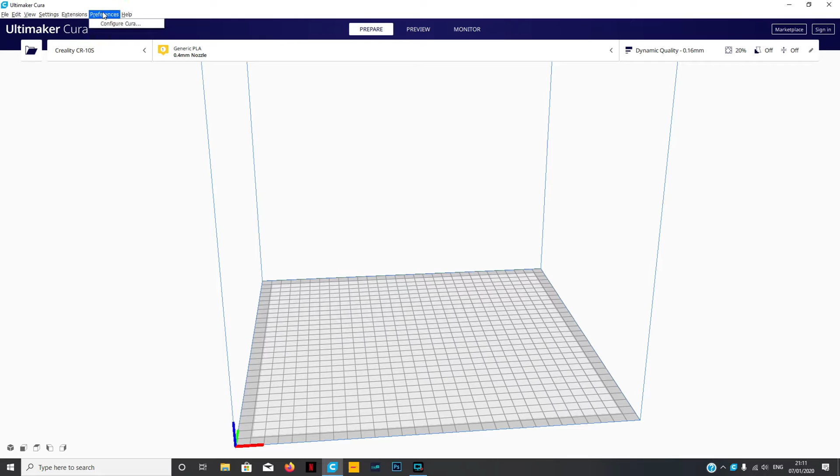And there we go. You're not going to be greeted with this screen to start off with when you're first setting up. I'll quickly show you what screen you're going to be greeted with. Now you're going to be greeted with this screen where you need to add your printer.

If you want to, you can add a network printer if your printer allows it, but I wouldn't recommend this option. The only problem is if you're running Windows like I am and it decides to do a Windows update and your computer wants to restart, your printer's going to end up losing communication with your computer and your print's going to stop, so you're going to end up losing it. So I wouldn't recommend you guys doing that.

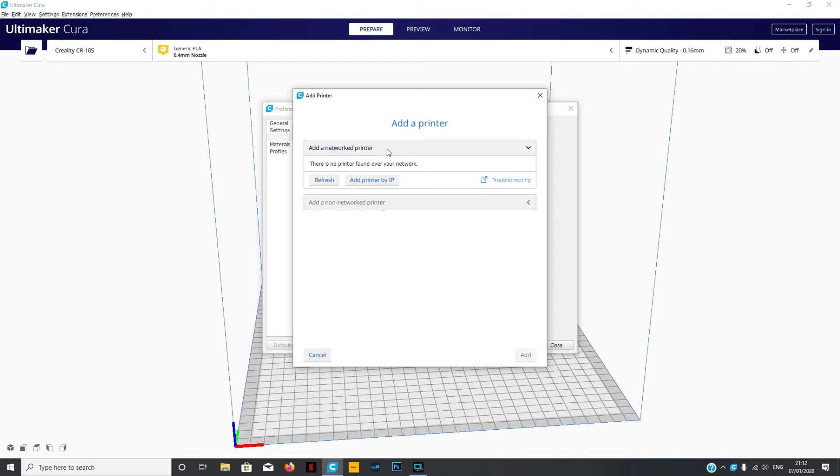What I'd recommend is adding a non-network printer. As soon as you click on that, you're going to be greeted with a big, huge list of all the different makes of printers. Now what I like about Cura is that mostly all the printers you'd use are actually on here.

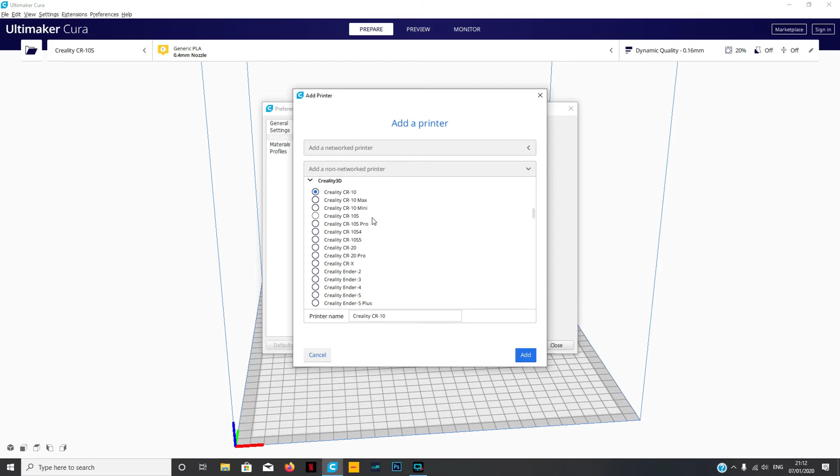So for instance, for me, I'm a bit of a Creality guy, so I'm going to open up Creality, and as I've just had a new printer delivered, which is the CR10S, I'll click that, and then I'll click Add. And then you're going to be greeted with the machine settings.

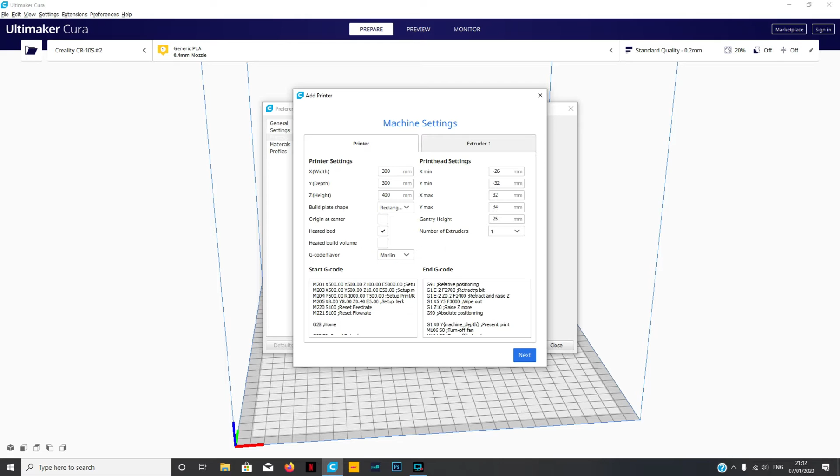Everything's already prepared for you. You don't actually need to touch any of this. This is all set up for you by Cura, so you don't need to change a thing. You just need to click next.

As you can see, I've got quite a large list, my printer is already added in here twice, because this is the second time I've had to do this, as the first time it crashed. So there we go, you want to close.

Now as you can see at the top here, you've got your printer selected, your Creality CR10S, and if I wanted to I could change it to one of my other printers that I've got listed, but obviously I don't need to do that because we're working on this one.

Right, what you're going to need to do next is obviously go and get yourself a file to print. So the best place to get them from is Thingiverse.

Now this is a free website. All the models on here are free to download, but they are all owned by individuals, so no selling them, people. That's not fair. So use it with a little bit of respect.

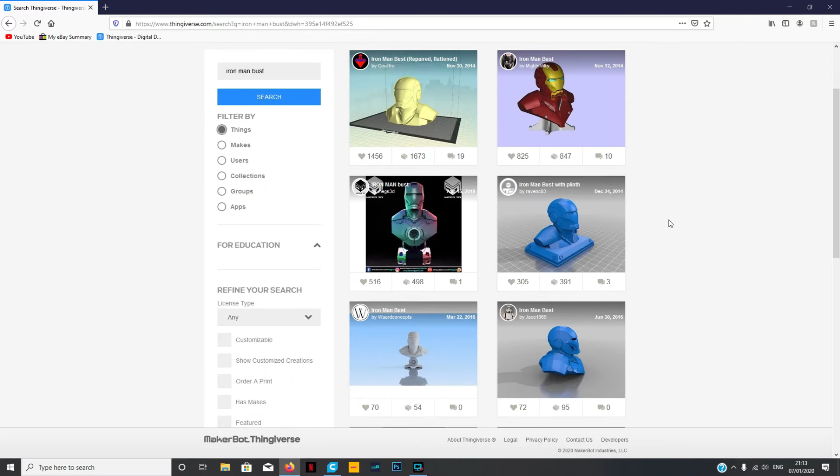So the thing I'm working on at the moment is an Iron Man bust. I've just printed one, and I'm going to print some more because hey, I love Iron Man. Once you've done your search, you're going to be greeted with all the files you could possibly want, so it's just a matter of going through and seeing what you fancy.

Well, I've just done a Mark 50, so we could go for, let's say, a Mark 85. Now there's going to be a lot of files in this, as you can see by the title - this is an Iron Man Mark 85 bust plus wearable helmet. So there's going to be a lot of files in here.

So we just click on the Files tab, and wait a while for this website to load because it is incredibly slow at the moment. As you can see, they are working on some performance issues. Hopefully it'll be resolved soon, but you can't complain because everything on here is free.

When it finally does decide to load up... really? Oh my god. Should have been a little bit more prepared for this, I suppose. I haven't actually used this screen recording stuff before, so I ain't got a clue. Yeah, still thinking about it.

There we go. Right, now these are all the files that are included. So once you're happy with what you've got, you can go ahead and read the comments. I'm not going to click that because then we'll have to wait another half an hour. But you can read all the comments of what people have downloaded and printed and what they think of it, and if there's any issues with it. Once you're happy, all you need to do is pop at the top here and obviously download all your files.

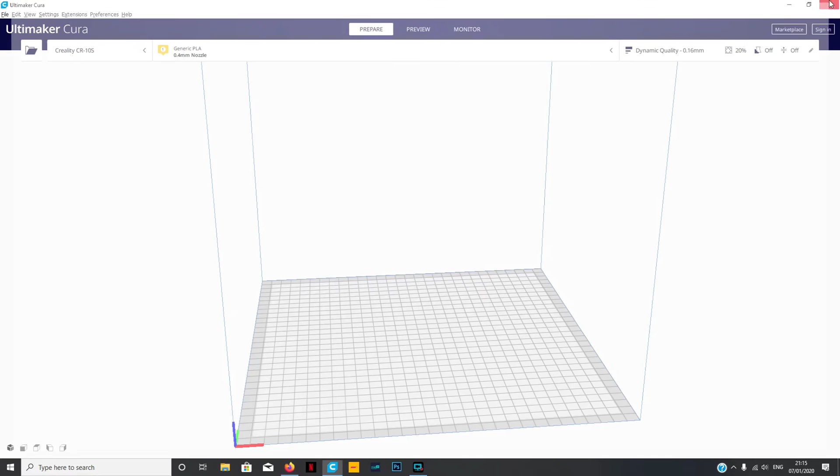Okay, so once you've downloaded your files, they're obviously all going to go into your download folder. As you can see, I've already downloaded some. So all you're going to need to do is extract or unzip the files, so you can ready to use them. Once you've actually unzipped your files, you need to put them somewhere where you know where they are. I mean, you see down here, I've made a folder with all my prints, and then subfolders with more of them in, and I've got quite a few on here.

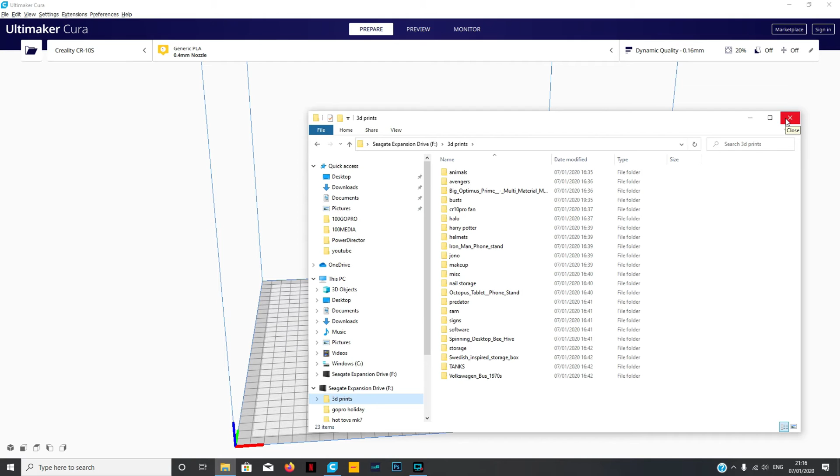So once you've unzipped them, move them to where you know they are, you're then ready to open up your file. So you need to click on your folder, and then you need to pick - not that one because that was another one - let's say this one. Okay, alright, you could check all the images to see the images of the files.

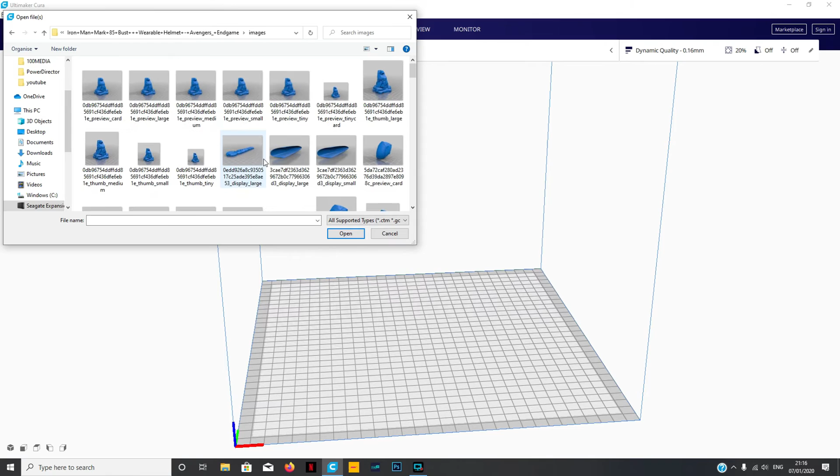And you go into the files, but I've already been through these and modified them, took out the ones that I don't want because there was lots in here, but these are the ones that are left that I actually need to print the bust.

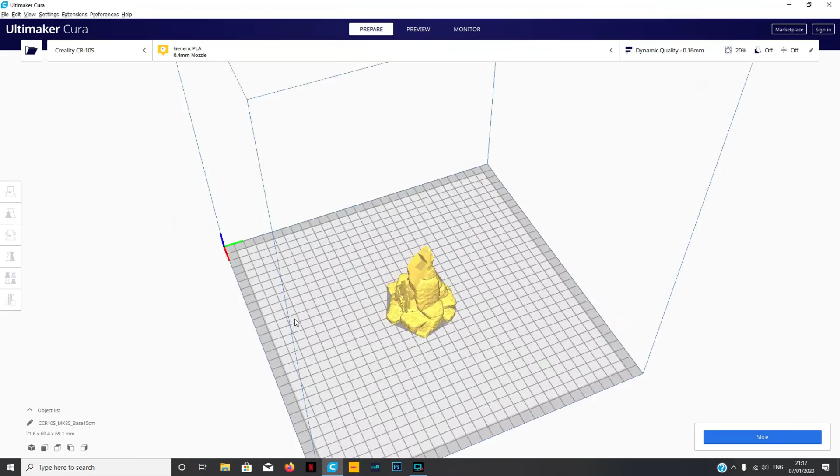Right, when you know which file you want to go for, we need to start off at the base. Open. Okay, there we go. And this is the actual part of the file - this is the actual model that we're going to be printing.

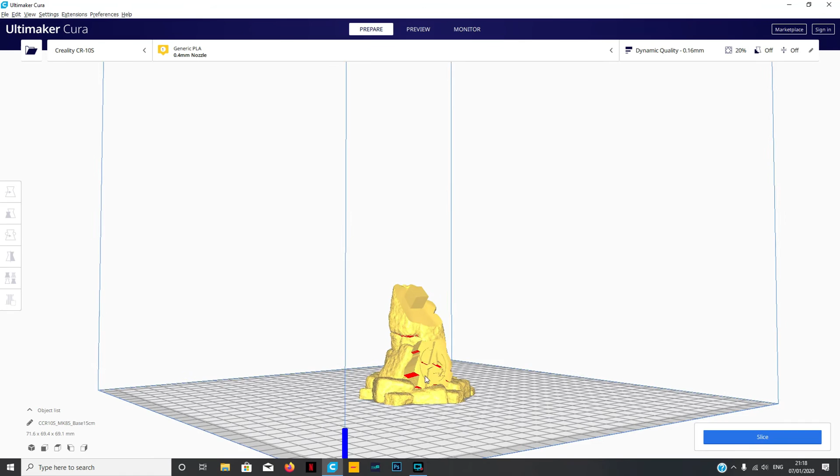I'll just have a quick look around it. Obviously the areas you can see here in red - don't need to worry about the bottom because that's on the build plate - but the areas you can see here are in red, they're overhangs. Now they're the parts that might give you problems when you come to print, not all of them will. These sort of angles here, they'll print just fine. But looking around this model, overhang wise, I really can't see any problem at all.

Right, now the next option is - this is far too small for my liking - so we're going to highlight the model and we're going to come over here on the left. Now the first tab is move, so you can hold your left click down, hold your left mouse button down, and you can move it around the build plate.

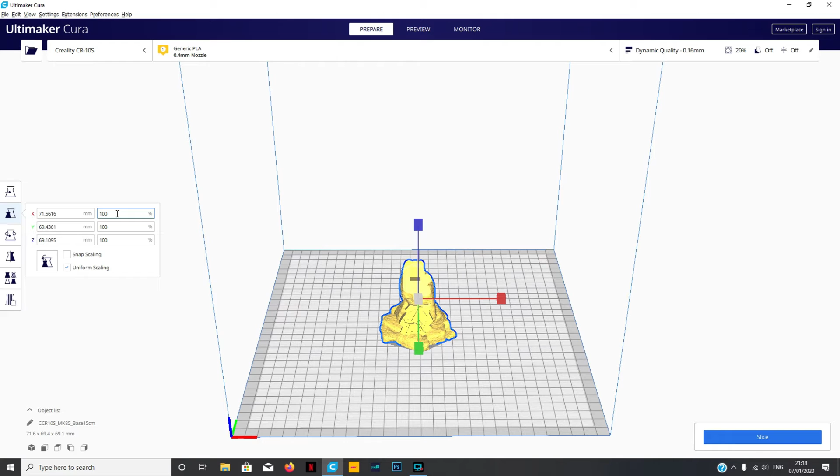Right, the second one down is scale. Now at the minute this is set to 100%, and obviously this is not big enough for me, so let's go in and put 200%. It's okay, we've just doubled the size of the model, so now it looks considerably larger. Obviously keep in mind, if you've done this 200%, you're going to then need to do every single other part 200%. One more note when you're into doing the scaling, you're best to have uniform scaling ticked.

Because if you haven't got uniform scaling ticked, when you adjust the X, which is obviously the width, you're going to get 200 width where everything else is going to stay exactly the same, so it's going to look odd. So just tick your uniform scaling and that'll then scale it all to size together.

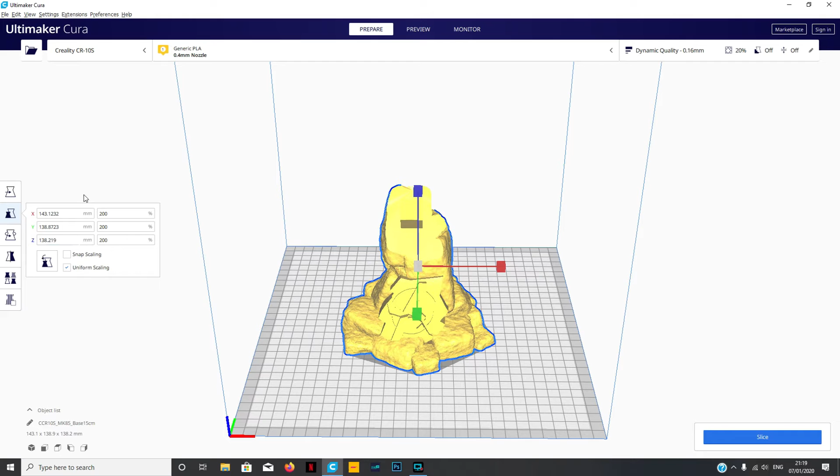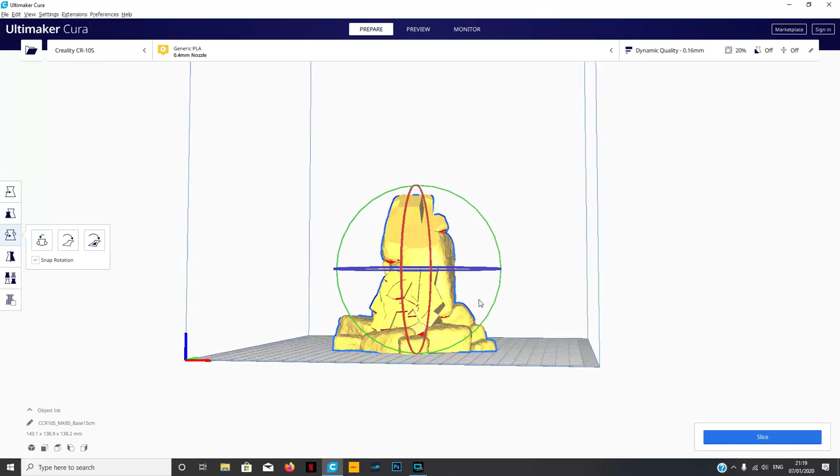Okay, so your next button down here is going to be your rotate options. I don't want to rotate this model, I want to print it as it is on its base. Some models, which I'll go into shortly - I'll try and find another one for you guys - but as it is at the moment, I don't want to change any of these. But if you did want to rotate it, obviously you just need to pick your axis that you do want to rotate and hold your left mouse button down and rotate it.

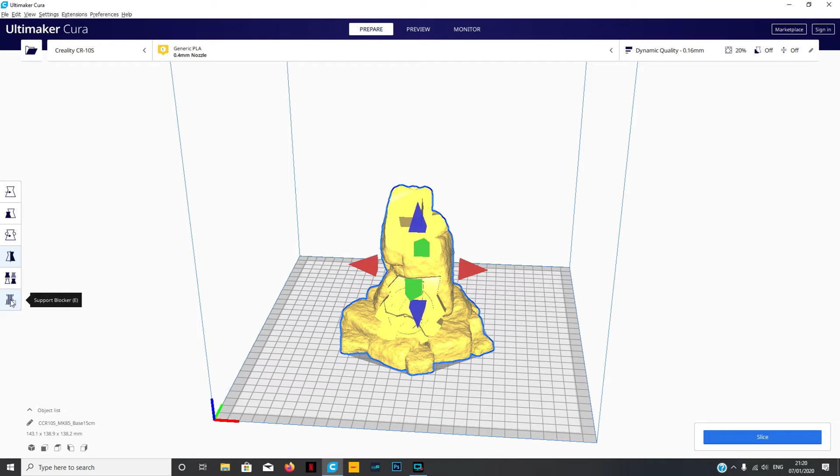Okay, your next button down is going to be mirroring. Now mirroring is helpful if you've got, say, a helmet - one half of a helmet - you could then mirror the other half of the helmet to match. It's not something I'm going to need to do today. Obviously this one is just blocking for doing your blocks for support, but I don't use those because I use what's already built into the program itself.

Now, next job, you need to prepare the file ready for slicing. So these are now your printer settings. Okay, this is going to be the standard layout that you will see. So the top bar will adjust the quality of your print. At the moment it's set to sort of dynamic quality.

Your next setting down is going to be your infill. The higher the number of infill, the stronger your print will be, but it will also use a lot more filament. Now for something like this, which is a bust that's not going to be moved, touched, or played with, you don't need a massive amount of infill.

Obviously you can't put 0% because then it won't print, it'll just all fall apart. So 20% infill would be absolutely fine.

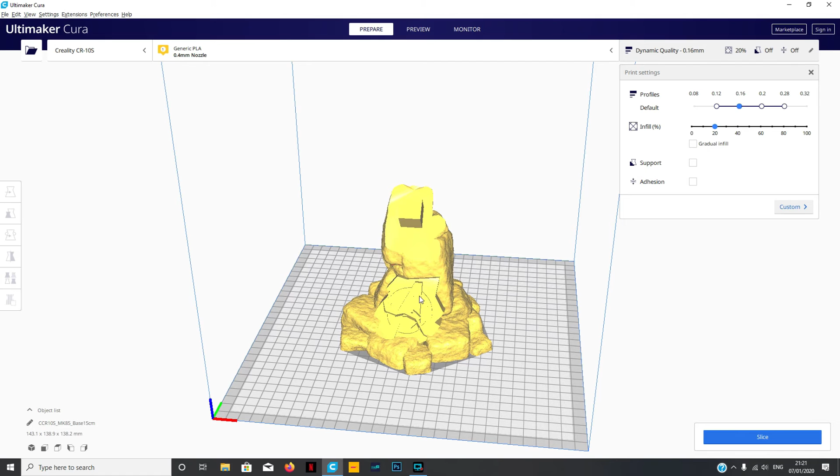Your next one down is going to be support. You're best not to tick this box in this section because it's going to generate some funky supports all over the place. It's fine for me on a model like this because I don't actually need supports.

Your bottom tab is obviously the adhesion tab. You always want to have your adhesion selected because that will print another layer around the bottom of your model, which will help it stick to the build plate.

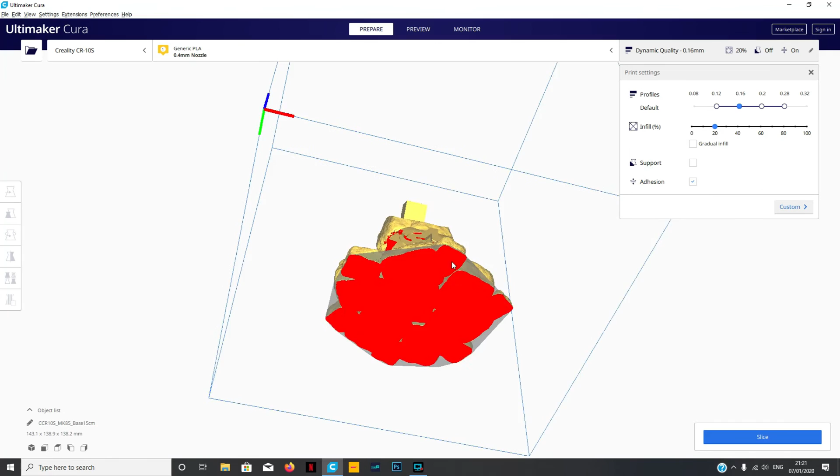Obviously something this size doesn't necessarily need extra adhesion because it's already quite large. But if you're doing something a bit more detailed, you'd need to go into custom setup. Let me close these tabs so I can start from the beginning.

Up here you can adjust your quality. Like I said before, 0.16mm dynamic quality. You can go up to super fine or standard. I'd recommend standard quality if you're just doing everyday prints, but for something like this bust I want a little bit better quality, so I'd always pick dynamic quality.

You don't need to worry about that. So that's the quality. Shell is all preset for you. I wouldn't adjust any of these figures; I would leave them completely standard as they are.

We've already discussed the infill percentage. As I say, bigger percentage means more infill, better strength, but you'll use more filament. But you can also change your infill pattern. At the minute it's set to cubic, which is sort of middle of the range.

It gives a little bit of strength without using too much filament. You could also do something like grid, which isn't as strong, and that uses even less filament.

And if you go down to, I can't even pronounce that word, octet, it'll weave it in such a way that it's quite strong, but obviously it'll still use a fair bit more filament.

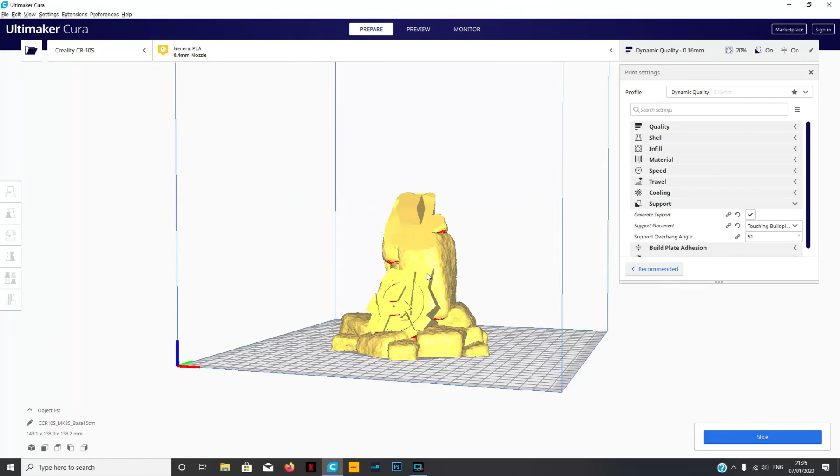I always leave that preset at 51 degrees, and it's never let me down. Okay, this is very simple. It's quite straightforward, nothing to worry about.

Right, now build plate adhesion. There are several options. A skirt is just going to draw a line around the outside of your print, which is about as much use as nothing. You're going to want to pick brim or raft.

Brim will draw several lines that are attached to the base of your model. It's always the best one to go for if you're doing smaller prints, because it will help your model stick to the build plate, and there's a lot less tidying up to do at the end, because you can just run your craft knife around the edge and it'll come straight off.

Raft is going to print like a platform on the bottom of your print bed before it prints the model on top of it. There's a lot better chance of your model sticking to the build plate, but you're going to have a lot more tidying up to do at the end, and it's going to use a lot more filament.

So I always recommend brim. Obviously it depends on what you're printing. If you're printing something like this, brim will be perfect. Anything that's a bit more detailed, you're going to want to go for raft to make sure it doesn't come unstuck off the bed.

I've never had a problem with PLA coming off the bed. I've always had problems with ABS, hence the reason I don't get involved with that anymore. It's just too much of a pain for me. And obviously dual extrusion, I haven't got a machine that runs with 2 extruders as of yet.

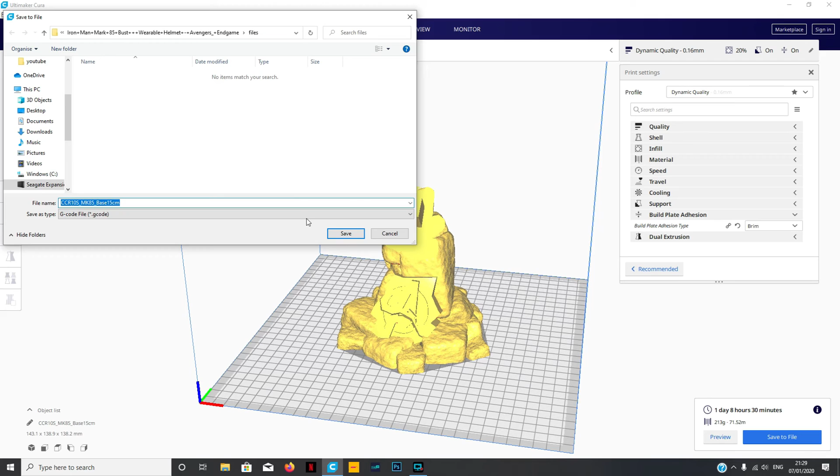Anyway, once you're happy with that, you want to save to file. Now guys, you want to put these somewhere where you know they are. Obviously I'm going to put it back into the folder where I've just got the original file from, so I know where it is.

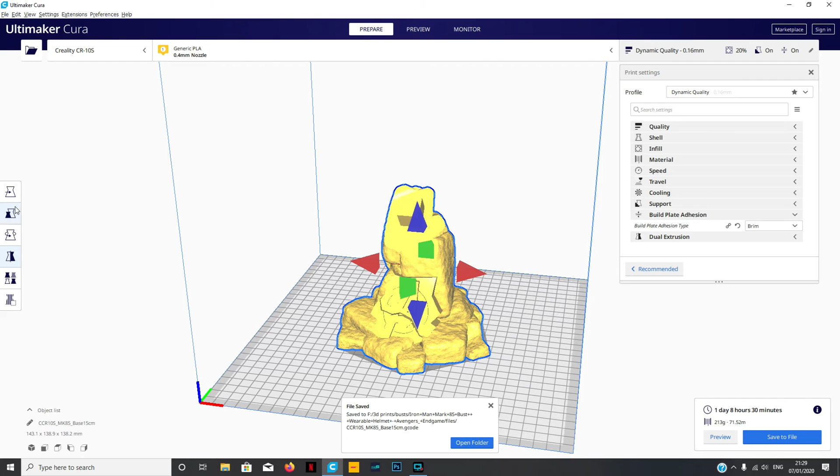Then once it's saved, it's saved. Another word of advice: if you've gone and done what I've done and changed the size of this model, and you have a memory like a goldfish, because I have, you need to remember the percentage you've put down, because obviously there's more parts to this model.

And if you've gone and printed one part and think, oh, what percentage did I just set that at, then you're going to be in a muddle. So 200% is what I've just set this at. Write it down if you need to, or if you've got a good memory then problem solved. You aren't like me, so yeah, remember that figure.

Then obviously once your file is saved, it's saved. Now, the other thing with this program, which is quite handy, if you plan on printing with something else that isn't PLA, or you want to change your nozzle size, this is the place to do it.

You can get various sizes of nozzles, as you can see here. I personally always use a 0.4. If you're doing really rough draft sort of work and you're not worried about the quality, you can go up to a 0.8. It will obviously print a hell of a lot quicker, but like I say, you're going to lose all the quality.

So you've got your 0.4 nozzle. Now you've got your material up the front, up the top here. I mean, you don't need to worry about any of these. What you want to worry about is the generics.

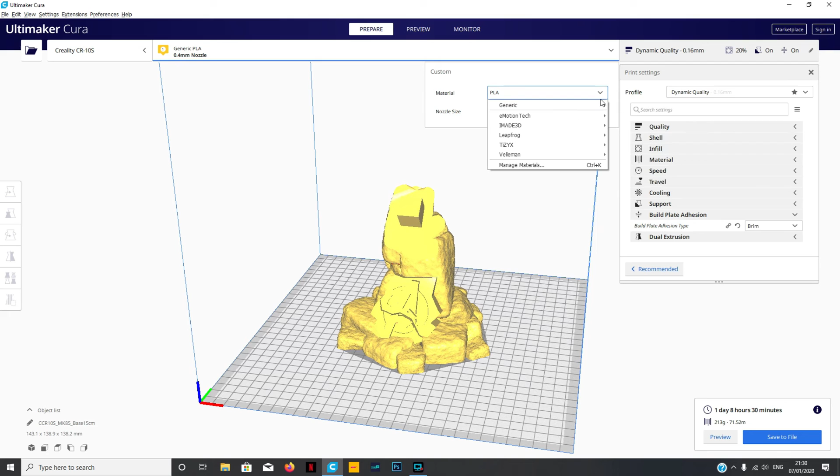So in here, if I did want to print with, say for instance, ABS, you then click ABS. I wish that would stop popping up because I don't really want that. And that'll then, when you come back into this, it would have changed all the heat bed settings for you. Now, this temperature here is a rough guideline, not hot enough, I'm telling you now.

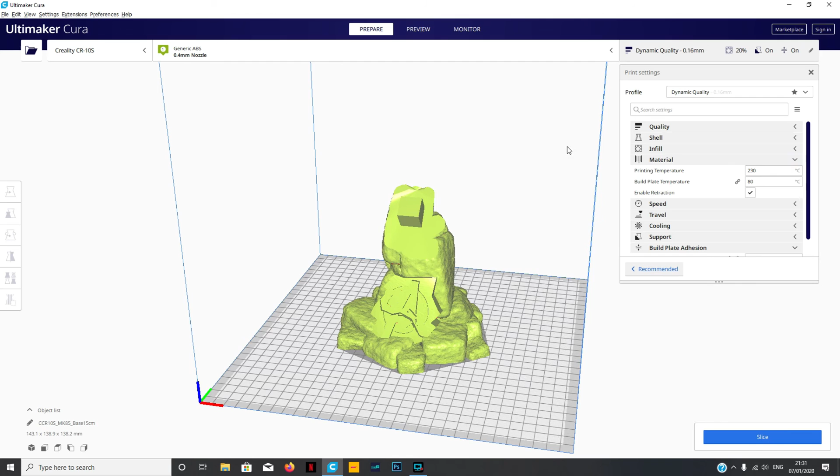And the same with the build plate, the same with the bed temperature, that's not hot enough either. But it does help you out to a certain degree, setting a few things up for you just to get you on your way. And it'll change the model to a pretty green rather than a yellow. Let me just put this back to PLA or I'll forget.

Anyway, so once you've got your file sliced, it's then a matter of getting your SD card or your micro SD card out of your printer, and plugging it into your computer like so. As you can see, these are some files I've been working on from a YouTube channel.

Now you'll need to go back down to where you just put your print. Mine was in 3D prints, and I can't remember which one I was working on. You'll be able to tell the difference between the files you've been working on and the files you haven't, because they would have changed to blue and you would have the Cura symbol.

Okay, so now all you need to do with this file is drag and drop it onto the root of your SD card. Don't put it in a folder, put it in the root of the card, because if you put it in a folder, some printers won't find it.

Oh, and one more word of advice. If you've got a Creality CR10S Pro, rubbish, if your title here is too long, it won't find it. I don't know why, so you'll have to go in and edit it to something a little bit smaller so you know what it is, especially if you've got multiple files on the same card. So yeah guys, that's about it.

Once that's your file prepared, plop it in your printer and you're then good to go.

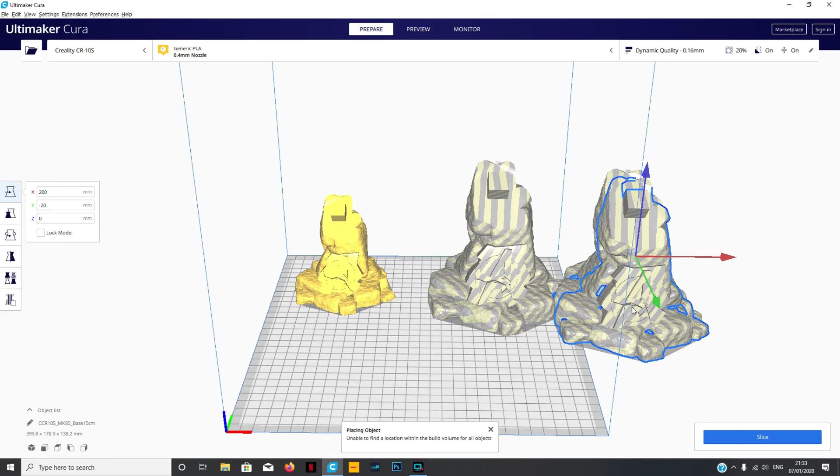I mean, there are several more settings on Cura we can go through. Obviously right click on your model, and you can center it, delete it, or even multiply this thing if you want to. Now let's have 3 of them. Yep, so there we go, we now have 3. So that's multiply.

Right, I want to find something a little bit trickier to print. Let's have a look. Torso, I reckon, will be a bit interesting. Iron Man torso is always a bit of a funny shape.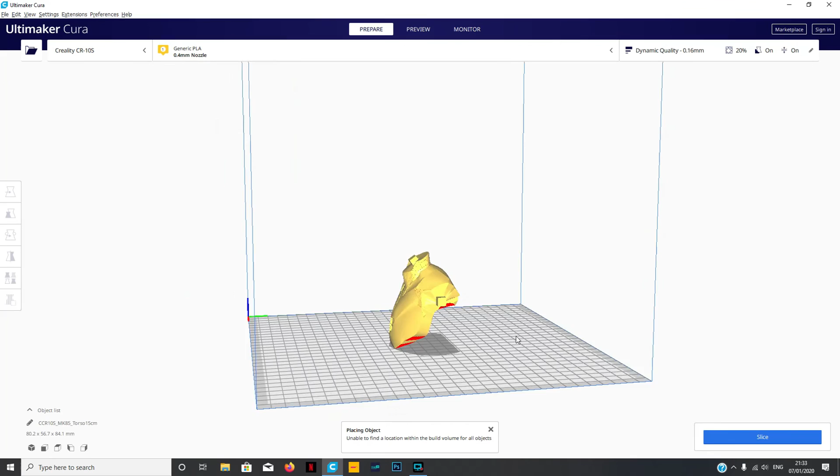Now here we go, so this is a good example. I would not print this way up personally, but that's down to you. Let's just make it a bit bigger - that's more like it. Because for one, you're going to have problems with adhesion, since anything touching the build plate is this little tiny edge there, and you've got a lot of overhangs.

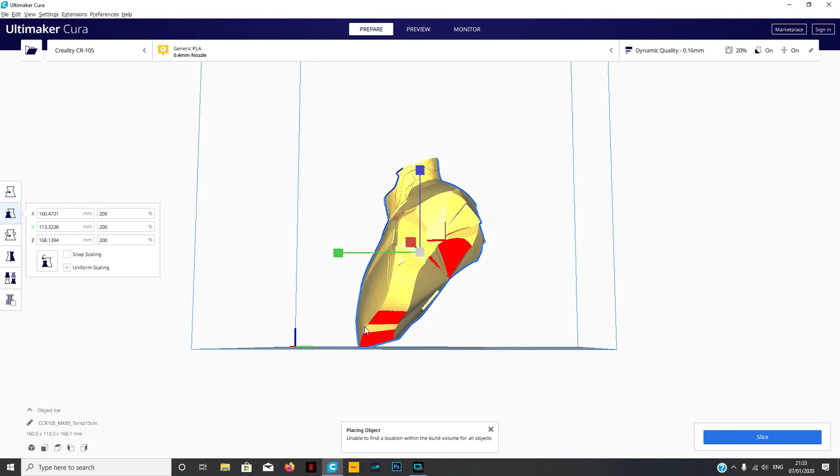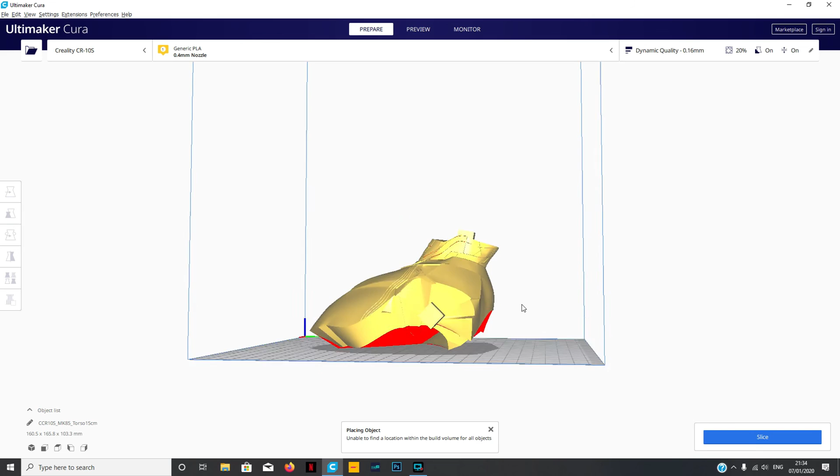So this is where the rotation tool comes in handy. Now your blue line is left to right, your green line is side to side, sorry, and your red one is front to back. So what we want to do is grab the red one, drop it down, and then look underneath.

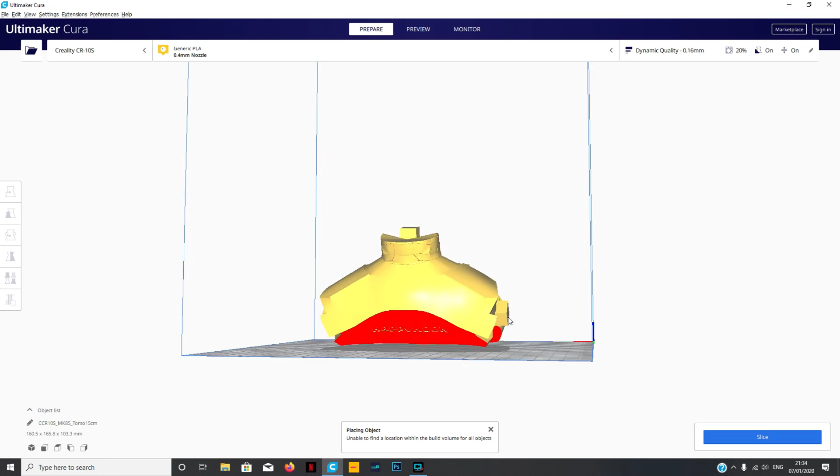And I can then see when I go to put in my supports, this whole area there would then be supported. I could flip it on its front, but I don't want any of the supports getting attached to the front portion of this, because it's going to make a mess. So along that area for me would be absolutely fine. Touching build plate supports on that would be perfect, because it would just print from the build plate up to the back of the model and hold it straight in place where I want it.